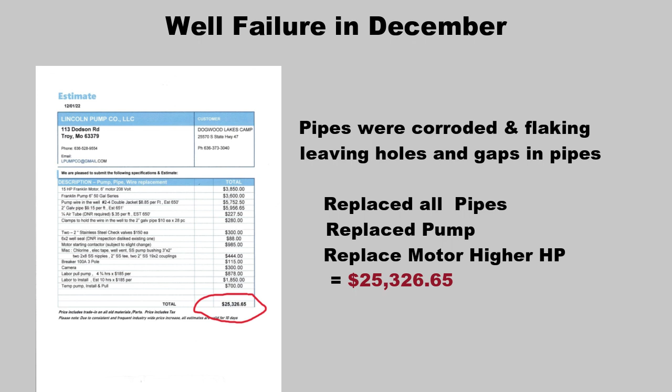We also upgraded to a 15 horsepower motor, increasing the gallons per minute, meaning that water is more readily available for the park. During this replacement, there were also cracks in the pipe between the well and the caretaker's house that needed replacement. We also added a hardwired baseboard heater in the well doghouse for the winter months. And we replaced the chlorine injection pump in the water system that quit working. These costs were an additional $2,000.

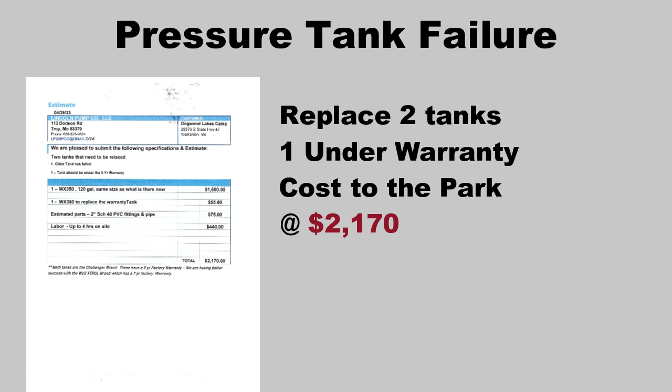Then earlier this spring, 2 of our pressure tanks went out and had to be replaced. As you can see in the picture, our pressure tanks sit on the concrete floor of the caretaker's basement where there's moisture and water leaks. This is what causes the bottom of the pressure tanks to rust out and fail. We were advised to reroute our water system and raise these pressure tanks off the floor to prevent this. Since one of the tanks was under warranty, the cost to replace them was $2,170. Some recommended improvements to our water system would be to raise those pressure tanks.

Also, adding shutoff valves around the park would help us isolate water breaks. That way we don't have to turn the water off to the entire park to fix a leak. It was also recommended that we add flush hydrants around the park in order to flush our water system from time to time.

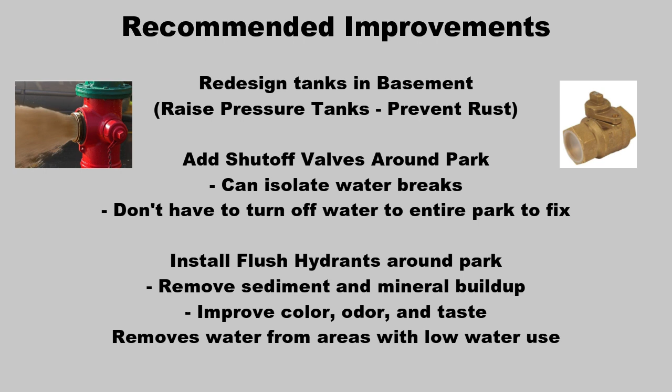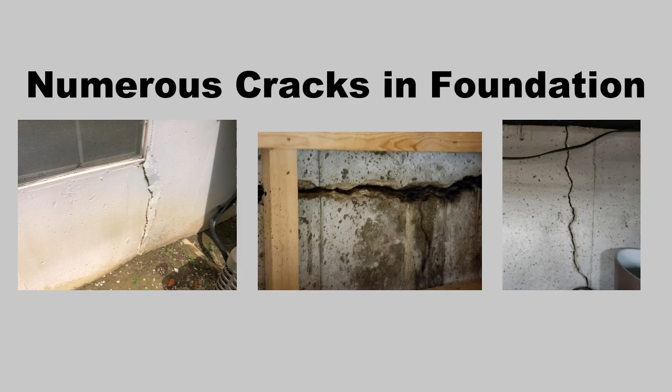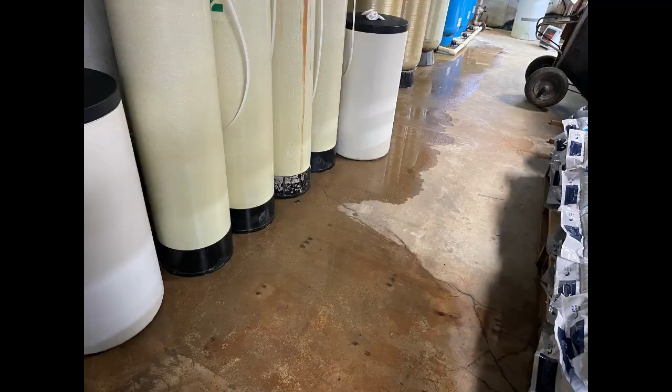Another one of my videos focused on the caretaker's basement, which houses our water system. There are numerous cracks in the foundation of the caretaker's basement. Every time it rains, water seeps in those cracks, and that is what poses part of the problem to parts of our water system, such as the pressure tanks. Here you can see pictures of after a hard rain, where different areas of the basement were flooded and water seeped through the cracks. We brought in experts for bids to repair the foundation and found that the repairs would cost $35,000 to $37,000 to fix it.

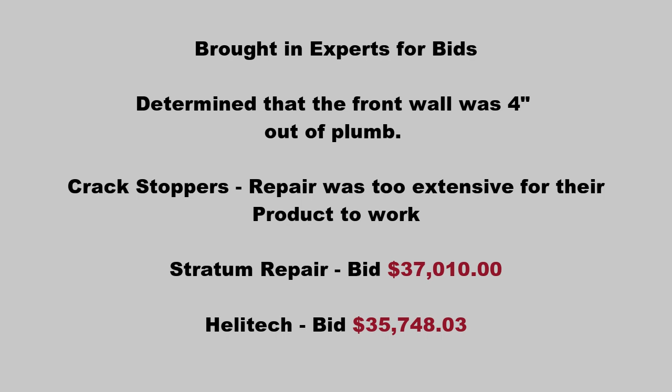Being that we didn't have that amount of money in the budget to make repairs, we decided to gather some volunteers and add some gutter downspouts and add drainage pipes surrounding the caretaker's house to hopefully help eliminate the water seepage into the basement. From what we can tell so far, this did help eliminate a large amount of the water leaks in the basement.

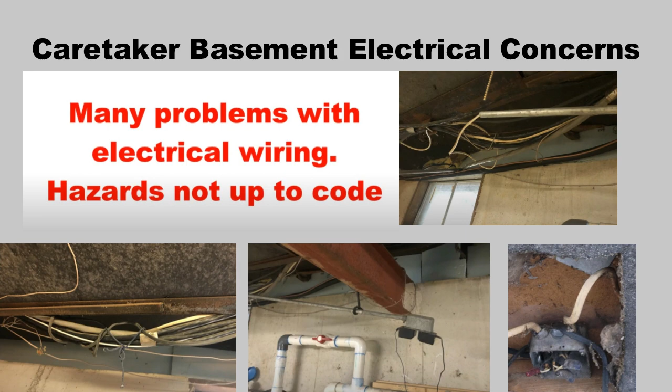Another concern that one of my videos focused on was the many problems with the electrical wiring in the caretaker's basement. There were numerous electrical issues and hazards in the basement, and we brought in Wishmeyer to take a look at the electric and see what needed to be done to fix it all. In fact, our quote from Wishmeyer stated that this area has so much wrong with it that an accurate estimate cannot be determined. It was determined that the cost of rewiring the caretaker's basement would be reduced if the insulation was removed prior to the electrical work.

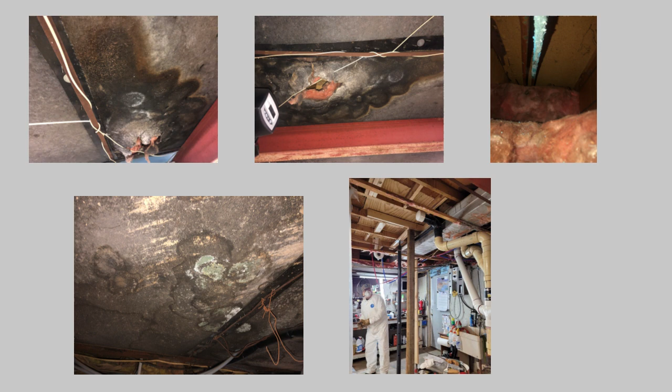We tested the insulation to check for asbestos, and once the results came back negative, myself, Shane, Don, and Michelle spent numerous hours removing this insulation. It required wearing hazmat suits and masks due to the large amount of mice feces, urine, and moldy insulation. Here are just a few pictures of the insulation that had to be removed.

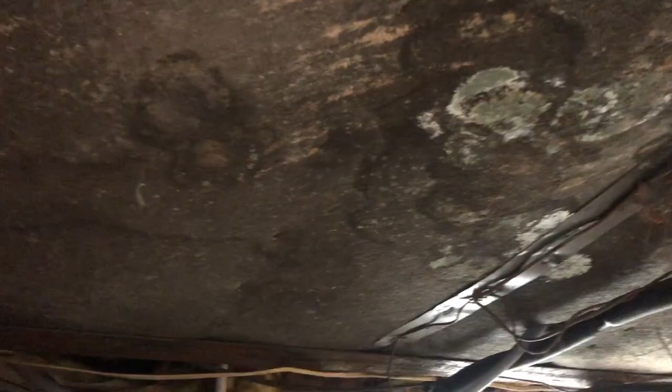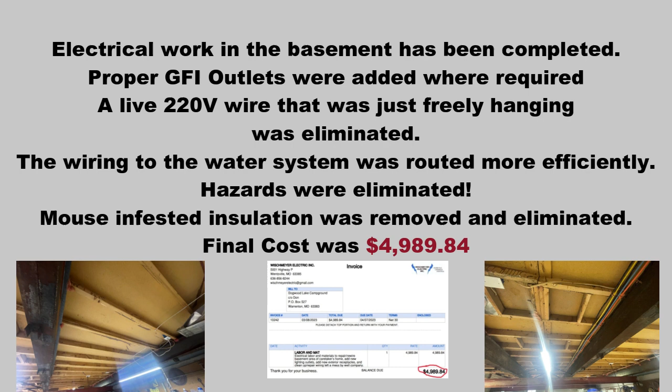So all the electrical work in the basement has been completed, proper GFI outlets were added where required, a live 220 volt wire that was just freely hanging was eliminated, the wiring to the water system was rerouted more efficiently, and most of all hazards were eliminated. Final cost was just under $5,000.

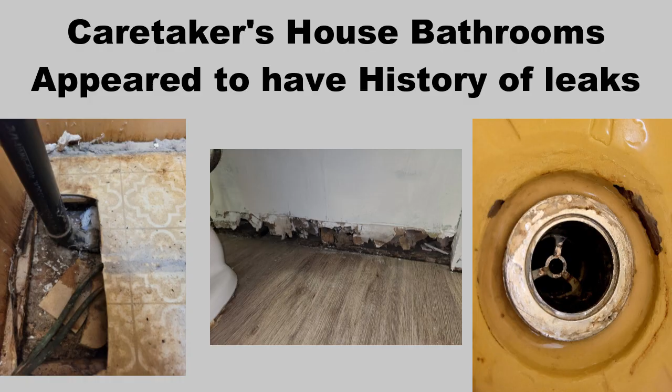Next we'll visit the caretaker house bathroom, in which there have been leaks and water damage over time. Looking at these pictures, you can see some of the cause and the extent of the water damage to the bathroom in the caretaker's house. Some questioned the presence of mold in my previous videos. We tested for toxic mold and found none, but after the drywall was removed, more pictures were taken as can be seen here, which certainly appear to look like there was mold present at some point in time.

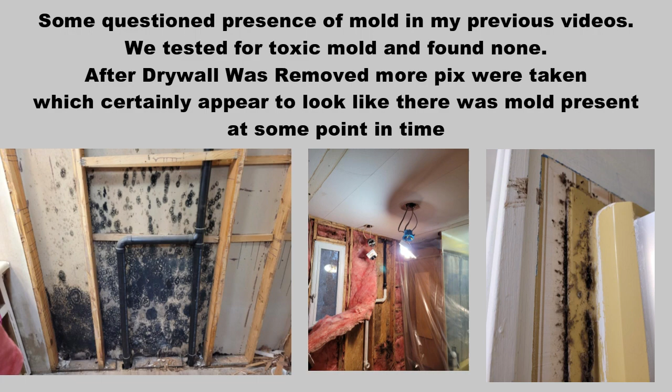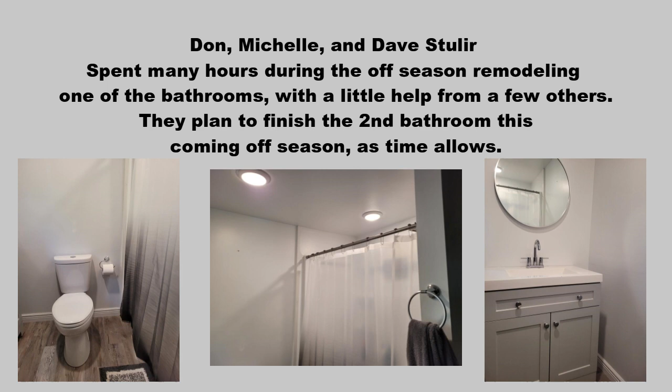Due to the difficulty in finding a contractor to make improvements to the bathroom, Don, Michelle, Dave Stulir spent many hours during the off-season remodeling one of the bathrooms. They plan to finish the second bathroom this coming off-season.

Next we'll take a look at the pool. We brought in some pool companies to give us an idea of what to do to fix the pool. As stated in last year's videos, there are numerous cracks which allow the outside water to seep in the pool, making it difficult to keep the pool chemical levels balanced.

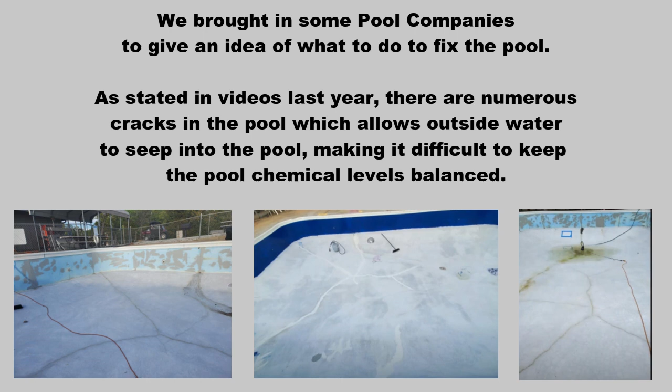We inquired about the possibility of using a fiberglass pool insert from Washington Pools and received quotes of $59,450 and $62,650 for different sized inserts. Then the gaps must be filled in between the insert and the pool walls, and a sump pump system must be installed in order to prevent the insert from floating. This option would be very expensive.

We received a bid from Lehman LLC to repair the pool walls and fill with fiberglass, along with gel coating the panels of the pool a base white. This cost totaled $8,900. We received a bid from Summit Plastering to sandblast, remove excess hollow areas, fix cracks in the pool, acid wash, bond coat, and apply new plaster to the pool, and the cost was between $17,900 and $21,500 depending on the plaster type.

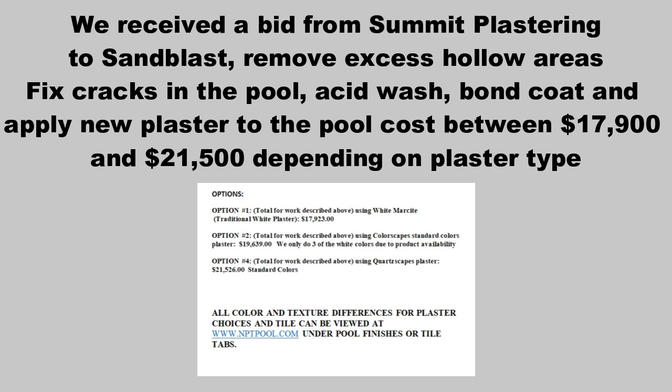Next we'll revisit the sewer plant. Patrick is in the process of removing the sludge in our sewer plant. He is concerned that our skimmers aren't functioning properly, and they will be evaluated once the sludge is removed. There is also still a concern of pipes that are rusting away, and we've had a few tests that our numbers are outside the proper range for DNR, although our most recent numbers were in range. We need to fix these problems soon so that we can avoid any further problems or failed tests with DNR that could eventually result in fines for our park.

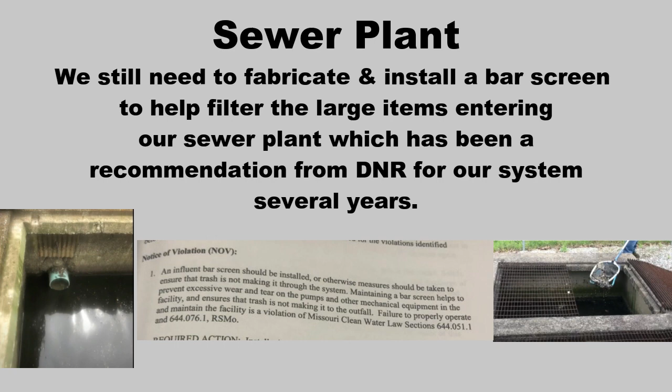We also still need to fabricate and install a bar screen to help filter the large items entering our sewer plant, which has been a recommendation from DNR for our system for several years.

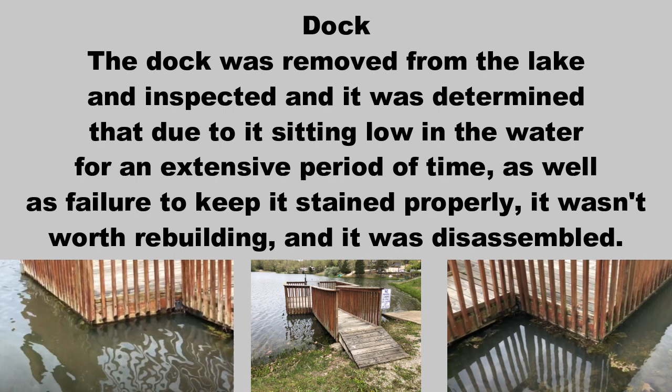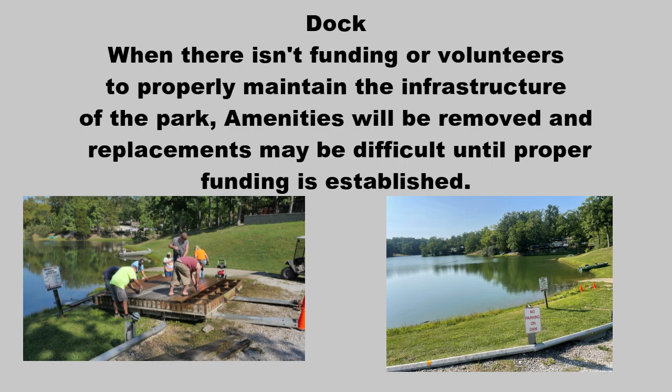Next we'll revisit the dock. The dock was removed from the lake and inspected, and it was determined that due to it sitting low in the water for an extensive period of time, as well as failure to keep it stained properly, it wasn't worth rebuilding and it was disassembled. Sadly, when there isn't funding or volunteers to properly maintain the infrastructure of the park, amenities will be removed and replacements may be difficult until proper funding is established.

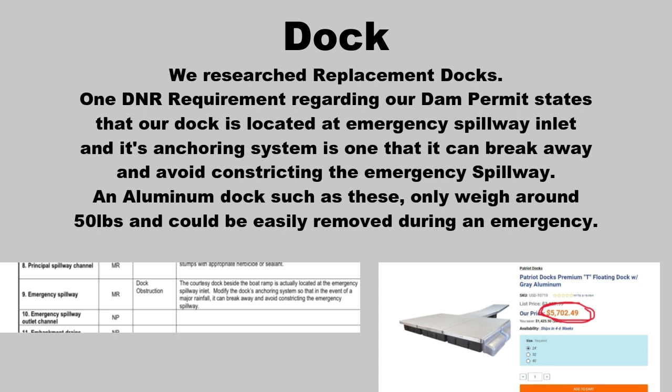We researched replacement docks, and one DNR requirement regarding our dam permit states that our dock is located at an emergency spillway inlet, and its anchoring system is one that it can break away and avoid constricting the emergency spillway. An aluminum dock such as these only weighs around 50 pounds and could easily be removed during an emergency. Cost is around $5,000 to $6,000.

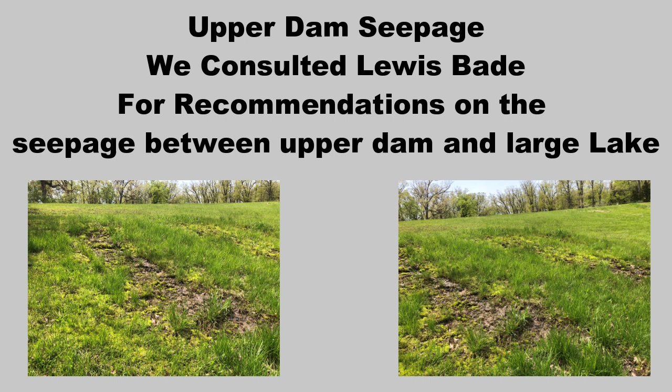Another of my videos dealt with the upper dam seepage. We consulted Lewis Bade for recommendations on the seepage between the upper dam and the large lake.

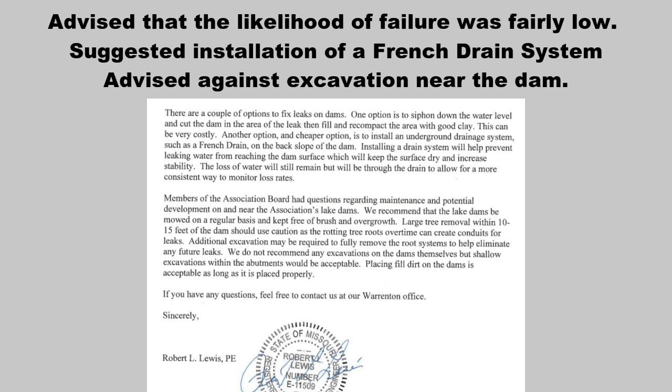Our concern was the breach in the dam and the upper lake eventually draining down into the lower lake. Lewis Bade advised that the likelihood of failure was fairly low, and they suggested the installation of a French drain system. They also advised against excavation near the upper dam.

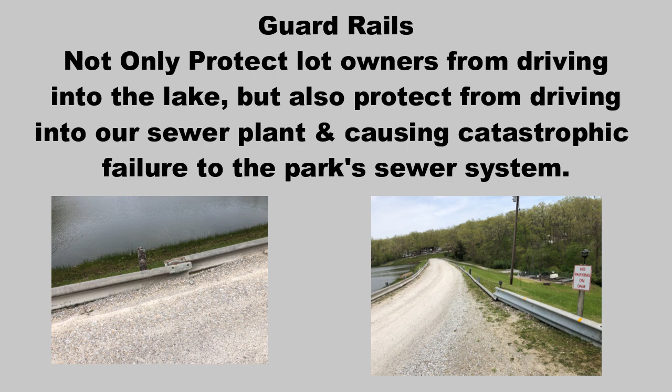Next we'll revisit the guardrails on the dam. They not only protect the lot owners from driving into the lake, but also protect them from driving into our sewer plant and causing catastrophic failure to the park's sewer system. We received a bid last year from Collins and Herman to fix the guardrails using our remaining guardrails. The bid totaled $36,470. We proposed a special assessment at last year's annual meeting to fix the guardrails, but that proposal failed.

Without a lot of extra money in our budget, it's sometimes necessary to call on volunteers to help fix and maintain areas of the park. This cuts down on the costs of labor of hiring an outside source. Over the last 2 years, we've worked hard on many projects along with some great volunteers to attack various projects around the park. Many thanks go out to all of those who have offered their time and effort into helping to improve the park and to saving us money that we desperately need.

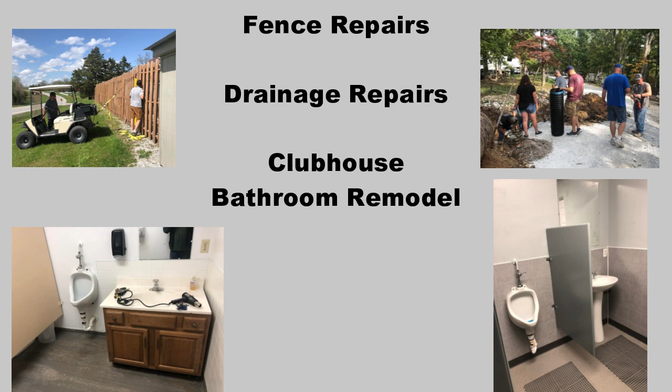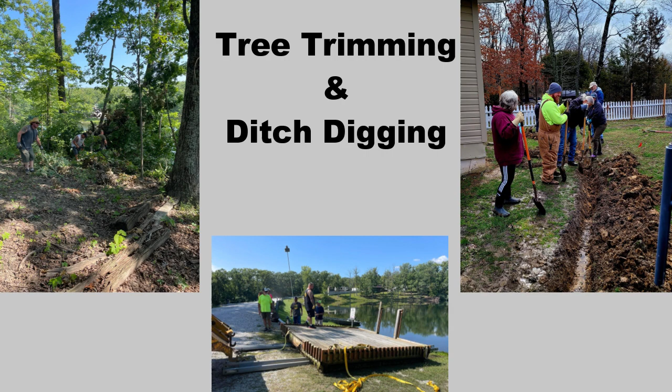Other recent volunteer efforts included roof repairs, pressure washing and staining, fence repairs to the pool area, drainage repairs, clubhouse bathroom repairs, bathhouse repairs, and camera installations by the dumpsters. Volunteers also helped with tree trimming and ditch digging, as well as branch and pond cleanup. Thanks again go out to all of those who helped participate in these projects.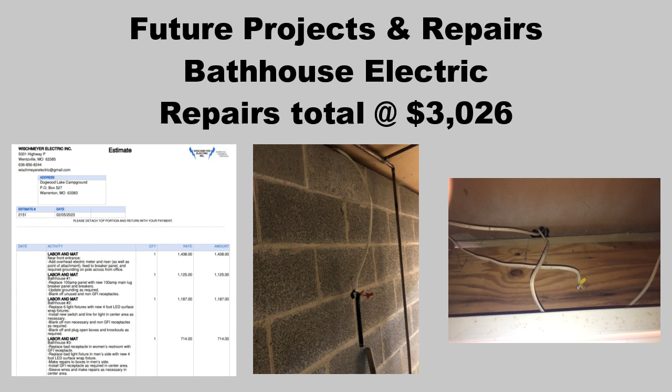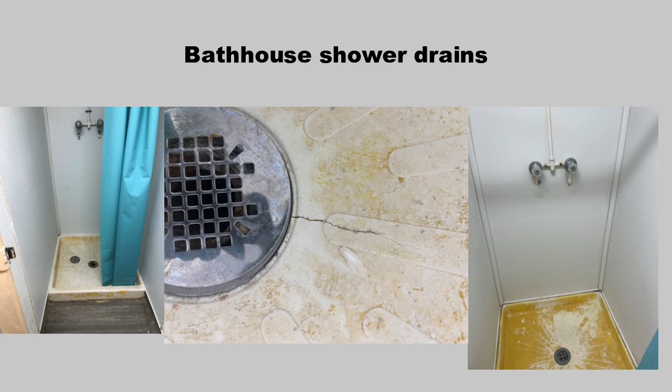We have identified some other areas of our park's infrastructure that should probably be addressed in the near future. Similar to the caretaker's basement, there's electric issues in some of the bathhouses that need to be cleaned up. We got a bid for $3,026 to do that. Many of the bathhouse shower drains are old and have cracks in them. It's time to replace these drain pans or seek another solution.

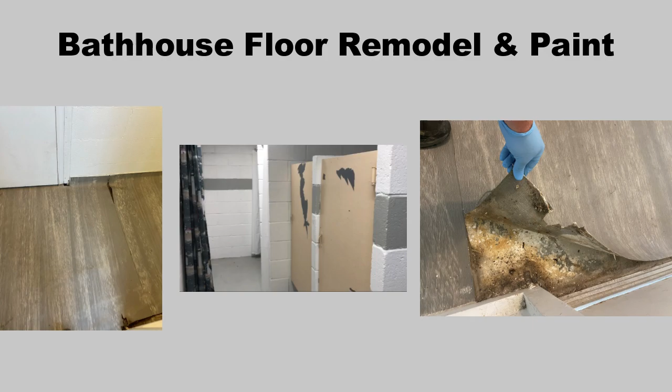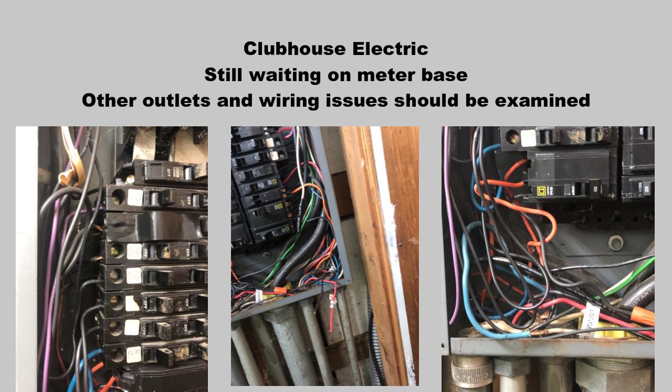In bathhouse 1 and 2, the vinyl flooring is starting to peel up. It's probably time to remove that and paint the floor like we did in the clubhouse. And also just a fresh coat of paint to the entire interior would be helpful. The clubhouse electric also still needs attention. We're waiting on a meter base. There are other outlets and wiring issues that should also be examined. The insurance flagged us for tape on breakers. Some of the wires are just hanging in there without ends on them, and some of the wires that go into the breakers aren't stripped properly.

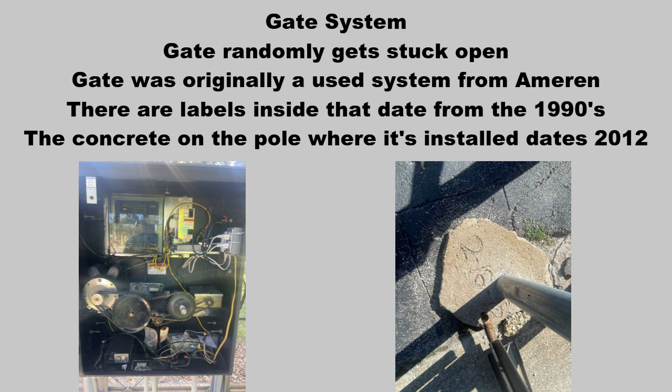I know it was long, but the purpose is to show you why we need a steady amount of revenue generated in order to do the preventive maintenance on the infrastructure of our park. As you can see, we're willing to put in the time and effort to maintain and make repairs. We just need the funding to do so. There are costs involved with doing proper maintenance on something, like staining the dock, adding drainage around the caretaker's house, rerouting the pressure tanks in the basement, or hiring a professional to fix electrical work. But in the long run, these costs are far less than replacing entire pieces of failed infrastructure or dealing with a hazard that resulted in injury or death.

Another advantage to having more money in the budget for this type of maintenance is that it would help eliminate the need to continue to attempt to get numerous special assessments passed to repair each large cost repair project around the park. It would also allow us to put more money into our reserve funds for large cost emergencies so that we wouldn't have to wait for an assessment to be passed to generate funds for each emergency repair.